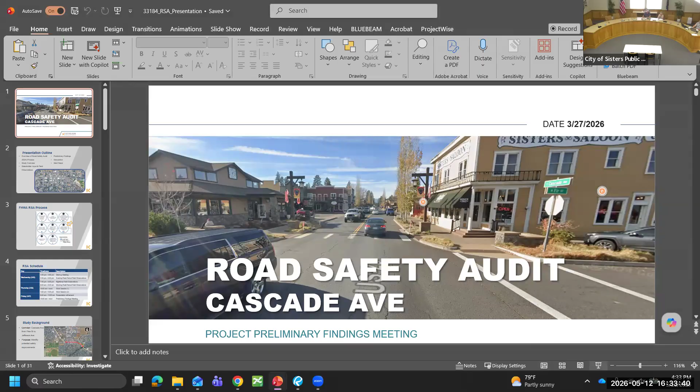Great, thanks, Paul. Thanks for the chance to be here. Matt Kittelson with Kittelson and Associates, and Cameron Thompson here with me. We'll walk through the nuts and bolts of what we did and why. We also had Hermanus Stein. He and Cameron were here conducting the audit. Hermanus is out of the country now, so he's shared his insight throughout the process and beforehand.

I think Paul did a great overview, so I'll just add that the roadway safety audit is a tool that exists. This approach has been conducted in many places, and the intention of it, I think, is really well suited for what the city was trying to do in this particular case, which was: let's focus on a really specific area of town, identify those boots on the ground, observe the conditions during different times of day, different conditions, talk with the people who see it every day, with the intention of really identifying what those solutions can be, tailored to the particular corridor. It's not a broad citywide plan, it's really focused on this specific area.

So I think the process went really well. The outcomes are exciting to lean into. So I'll turn it to Cameron to walk through the process. If you have questions along the way, please raise your hand. We'd like this to, as much as we can, be a conversation about what happened and what we do next.

Thank you. So the presentation here was our final presentation to the road safety audit team, but it provides a good summary of our observations, and then a toolbox of suggestions to hopefully mitigate some safety issues.

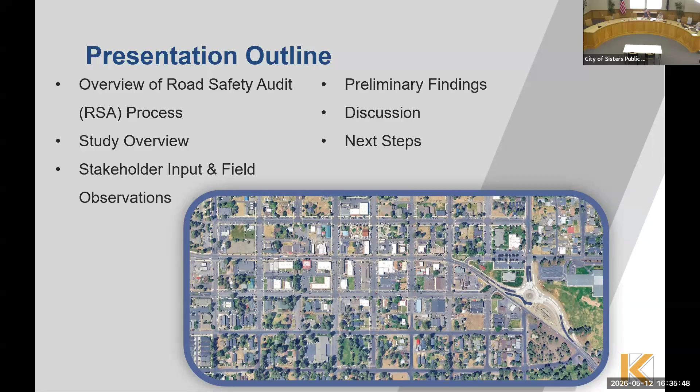We went over the RSA general overview of what it is, but we're more in step 7, 8 now as part of this process. Just a reminder of those 3 days in spring break in late March, we had a startup meeting getting everyone's thoughts and ideas before we went out and did field observations. Then we did field observations in the afternoon, nighttime, and morning, and refined those thoughts Thursday afternoon and Friday as well.

Looking at the actual corridor extents that we took a look at, it's Cascade Avenue from Pine Street to Jefferson Avenue. So this is where we're really focusing our observations and suggestions.

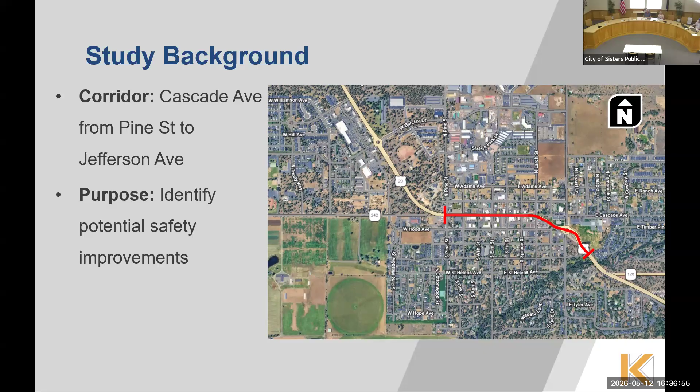As part of the process, before we started the whole 3-day RSA process, we took a look at the city's transportation system plan, looking at planned projects, looking at previous projects that had already been built, most notably the streetscape project through downtown. We also compiled crash data, taking the most recent available 10 years of data, from 2015 to 2024. So that doesn't include 2025 or any 2026 crashes in the data.

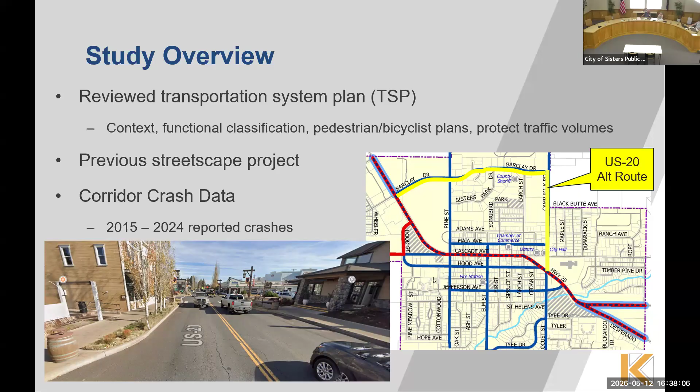And then, as you'll see later in this presentation, we'll bring up this US 20 alternate route a few times. That's really focusing on freight traffic, seeing if we can get it shifted away from the downtown core area and use Barclay and then Camp Polk as that freight route.

Just some general reminders of crash trends that we saw. There were a total of 71 crashes in this 10-year data set in our study corridor. 75% of those crashes were at intersections, and you can see on the map generally where those are. We also circled where pedestrian and bicyclist crashes occurred, and the dashed circle is where that most recent pedestrian fatality occurred. That fatality isn't included in the data because it wasn't available in the summary, but we did want to note that location.

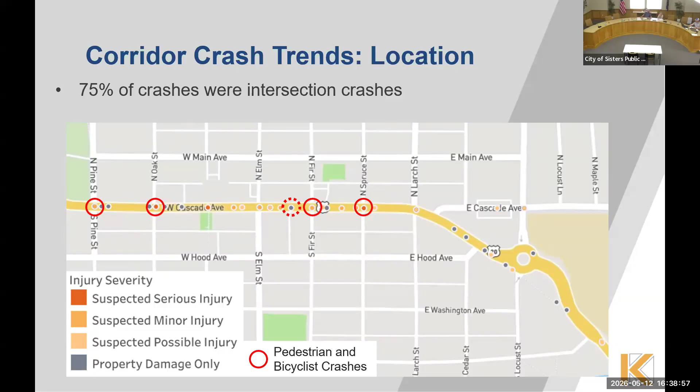Just some general trends here. We don't want to go too deep into the crash data, but about half of the crashes resulted in injuries. There were zero crashes in this 10 years of data that resulted in a fatality. Seven total crashes involved a pedestrian or bicyclist, with all of those as part of the injury crashes. Most crashes occurred during typical daytime, 11 to 6 p.m., at 72%. 34% of the crashes occurred in August and September, so late summer was where most of the crashes occurred. About half of the crashes were rear end crashes.

Now we'll get into some of our field observations when we were out there for those afternoon, nighttime, and morning periods. The first section that we summarized was pedestrian safety, looking at how pedestrians are getting around downtown. First, looking at the crosswalks, as you can see on the right, there are some areas where poles or other objects, or like a car or something, could be blocking a pedestrian waiting to cross.

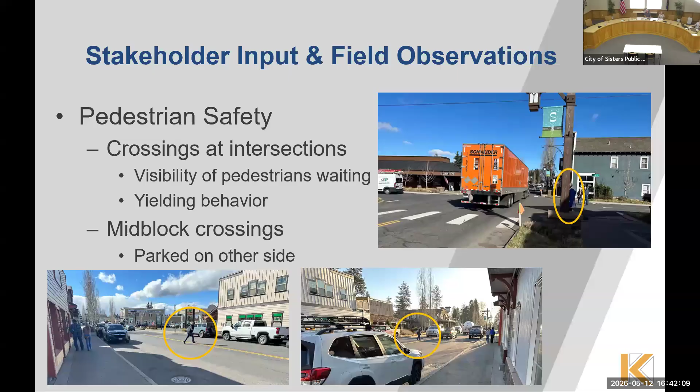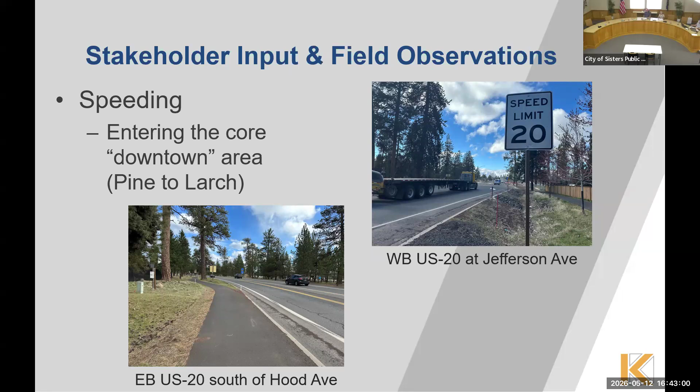Moving forward, looking at general speeding, that was a pretty big stakeholder input point that was brought up. We mostly noticed this on the approaches to downtown, as you're coming from that 55-mile-an-hour highway zone and getting into this step-down speed limit down to 20. Really looking at coming westbound on 20, you're hitting that merge of 126, and then eastbound after the Barclay roundabout, where people accelerate back up to speed and then have to come back down as they're coming into downtown.

Through the actual core area and congested times, speeding is not really apparent as everyone is bumper-to-bumper traffic through town, but definitely people following very closely, just trying to get through. Then off-peak, so mornings and nighttime where the street's pretty open, not a lot of cars parked on the sides, not a lot of businesses open, so people aren't walking around as much — definitely more speeding through that downtown area at that point, as it's just a flat, straight section of road.

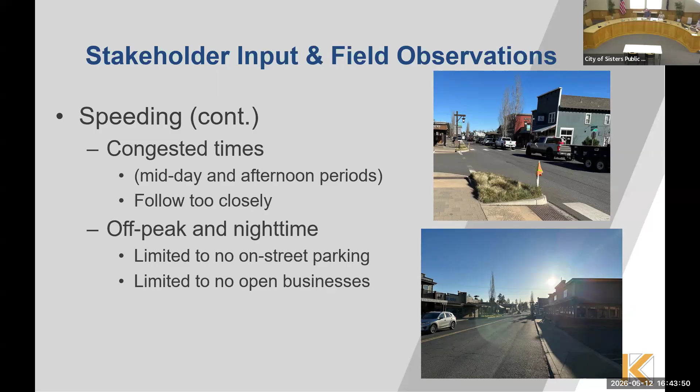Focused a lot on how drivers are getting through town and around town. Noticed a lot of people just moving, trying to get through downtown Sisters generally as quickly as possible. A lot of people with trailers and things as well, and then just a lot of things going on in your vision as you're driving — people stopped trying to take a left through that bumper-to-bumper traffic, a lot of pedestrians crossing, people trying to get out from the side streets. Just generally a lot going on.

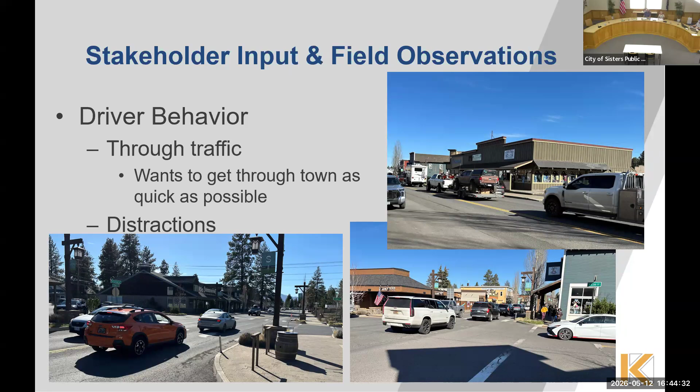Some intersection and crossing visibility items here. On the bottom right, you see a photo of the curb extensions not actually extending past a parked vehicle, so that can block sight distances for drivers coming up on that crosswalk to be able to see a pedestrian. And then lighting — there's decorative lighting there today, but it doesn't really reach the pedestrians crossing the street so that they're more visible to the drivers.

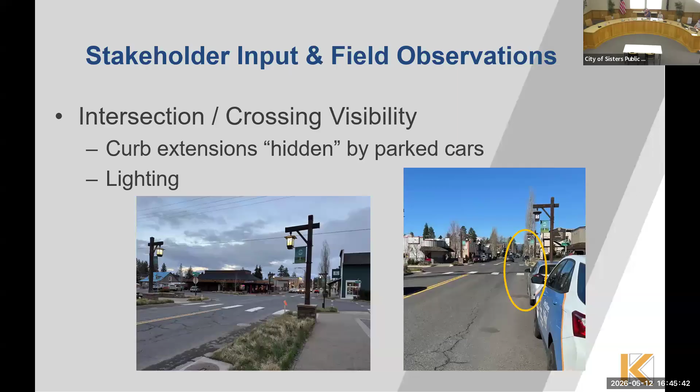Then we looked at what opportunities you have for some mitigation strategies for a lot of these things we've seen and heard about. So the next section of the presentation is really what the memo in the agenda is summarizing, or suggested opportunities. And this is a toolbox, so they don't all need to happen — you can pick and choose depending on what you want to try to address. Another important point I mentioned at the start is that a lot of these are dependent on freight traffic being moved away from the downtown core. There are a lot of requirements to a road that freight traffic is on, so some of these opportunities may not be feasible at this time, but may be feasible further down the line. US 20 is a reduction review route for ODOT, so there's broad influence that the greater community has with the design of that road.

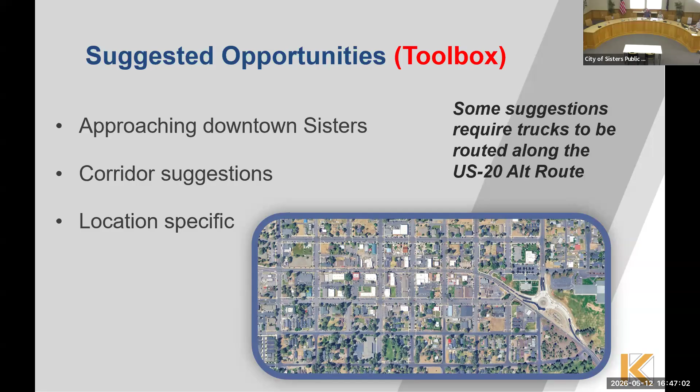So starting with approaches, we looked first at the approach from the west. If you're also looking at the memo, some of these will be shown in those figures. The first three figures are really summarizing near-term opportunities. What we'll show in the PowerPoint is a combination of everything, near-term and long-term, so it's a little bit different format but shows generally the same.

Can I ask a question? So I'm wondering — Bill and I've seen this, and then after we were involved, there was a poll put out to gauge people. I'm interested, was that of any use? Did that provide anything towards the recommendations and the prioritization, or did everybody have different things they liked best? So at least the memo in the agenda was before I think the survey went out, but then for deciding which of these options the city would like to move forward with, that's where the survey came in. So it was of use, and that relates to the priorities that were listed? Certainly allowed the options — nothing real clear.

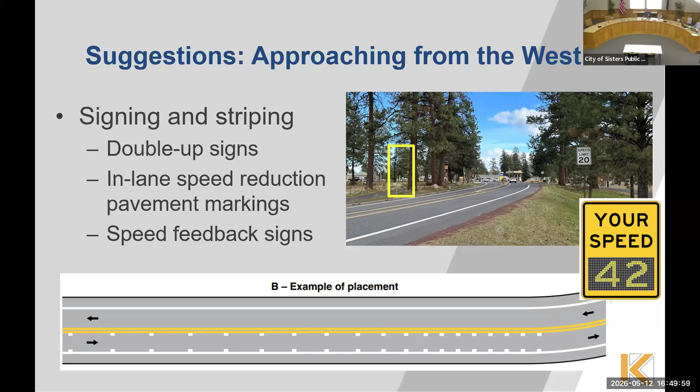Continuing, approaching from the west, this will be a much longer term option, but is a mini roundabout at Pine Street. So that's the thought behind this: as you're coming from the west, you hit the Barclay roundabout, that slows you down, but then you don't have anything physically making you slow down before you get into this downtown core. So it's an option here.

Currently just a concept sketch, just to see if it was feasible. This would be a smaller roundabout than the two you have in town currently, but would definitely require that kind of freight collaboration.

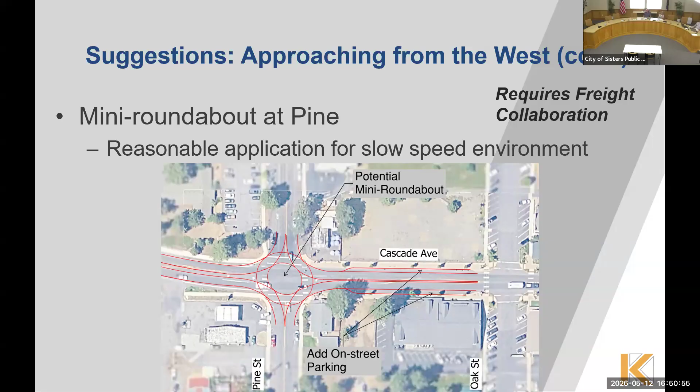Then looking approaching from the east, this is a project in the TSP, adding that roundabout at the intersection of 126 and US 20. This would allow us to remove that merge that complicates entry into town and creates that continuous effect where you slow down now at the 126 intersection, and then you'll get that reminder at the Locust Street intersection as well.

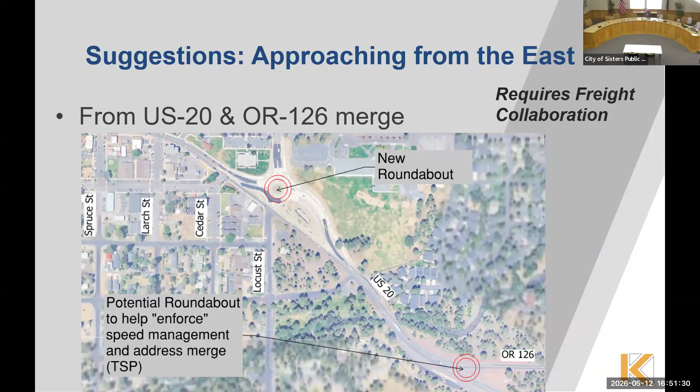If the roundabout doesn't happen, or before the roundabout could be built, you could address some things similar to the west side, doubling up those 20-mile-an-hour speed limit signs to get them more visible, especially during that merge, and also switching out the current merge sign, which is just a right lane end sign — kind of half of that sign essentially — switching it to this newer zipper merge sign that would hopefully encourage people to merge a little smoother through this section.

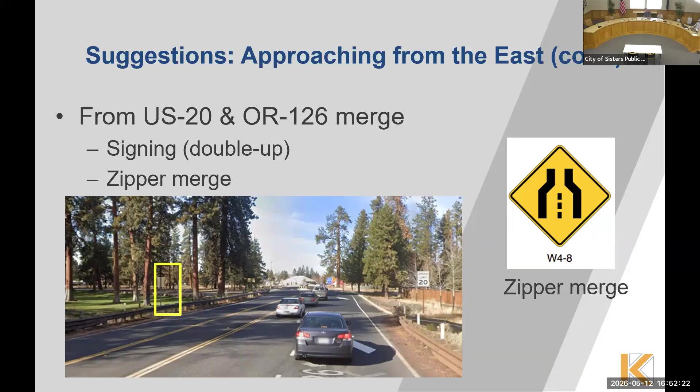There's a lot going on this sheet, but we'll talk a bit more about a lot of these options further along in this presentation.

The biggest one is probably the speed feedback sign after the Locust roundabout. We heard and saw a lot of people accelerating out of that roundabout as they come from that higher speed highway, hit the roundabout to slow down, and then accelerate out of it back up to higher speeds. So we're trying to keep them continuing at that 20-mile-an-hour speed.

And then I'll move along, but we'll also talk about some possible buffered bike lanes, lighting, raised intersections, and just some bike wayfinding signs.

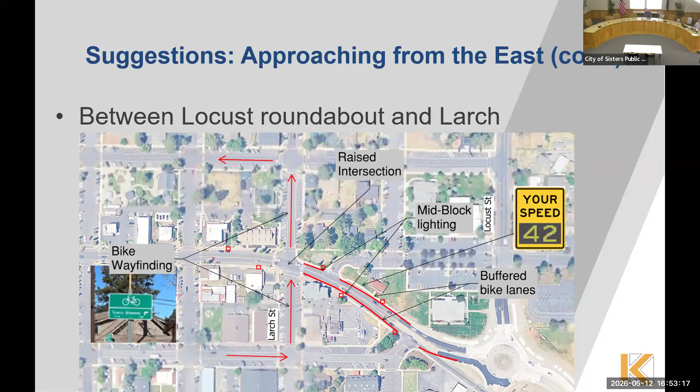Then also approaching each side, a couple options for warning drivers of pedestrian crossings. We didn't want to put pedestrian crossing signs or RRFBs at every crosswalk through the downtown core, as that would get very cluttered. So we figured putting them at the beginning of the corridor, warning people that there are pedestrians that will be crossing the road over the next about 2,000 feet.

I did have a question. Can you go back to one slide? Yeah. On the east side, the RRFB, either coming out of or going — well, I guess mostly the coming out of the curve to get there — is that an issue for design right there?

It definitely could be. We need to look a little more at sight distance, but you can also put in — see if my cursor comes up — an advanced flasher is also an option, but it would be something we'd need to look at for design of that.

I think the curve in general, to your point, having some advanced warning around the curve would be good for that. You can do those advanced warnings so that people know they're coming into it. If you do it too soon, you get that effect of people ignoring it as they get downtown. But we really want to alert them right as they're getting into that core, so figuring out a way to make it work in that general vicinity could help address the curve issue. It's a really complicated location.

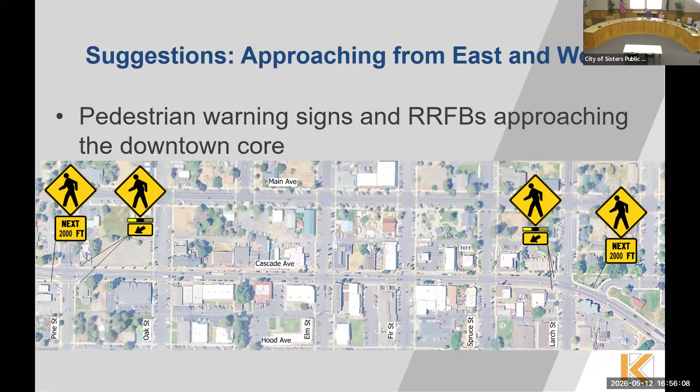So then looking more at the corridor, the downtown core area - these spot improvements, as they were described, are really trying to continually slow vehicles down as they're moving through the corridor, getting those physical reminders to continue moving at the 20-mile-an-hour speed.

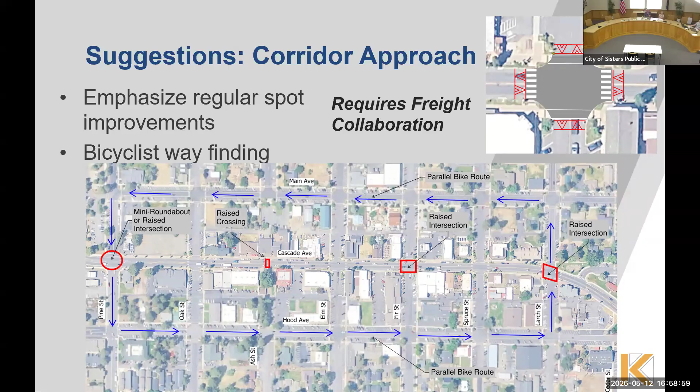Then we looked at how to restripe the entire corridor to reduce some of the lane widths that are there currently. And they're there currently because of the freight traffic moving through downtown, so this would definitely require collaboration.

Looking at the top cross-section, that's the current roadway cross-section with 8-foot parking lanes approximately, and then 14-foot vehicle lanes. So we have the opportunity to reduce those vehicle lanes, narrowing the width to a more typical 12-foot lane, and then provide a buffer between the parking and those vehicle lanes.

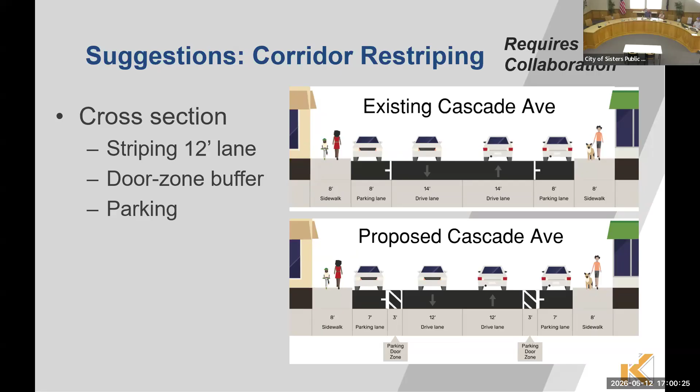This would hopefully reduce speeds with the narrower lane widths, but also provide space for people to open their doors when getting in and out of their cars. That was one safety concern we had heard - when people park along Cascade Avenue, they have trouble opening their doors or getting into their vehicles when it's busy.

And then continuing the striping at intersections - City of Sisters already has the curb extensions, but looking at how to further extend those without actually having to rebuild them. So adding a 4-foot buffer would keep the 12-foot lanes through the entire corridor, where we'd get a few extra feet.

And then those could also include tubular markers in that buffer area, so vehicles can't just drive straight through that area. I remember discussing that one.

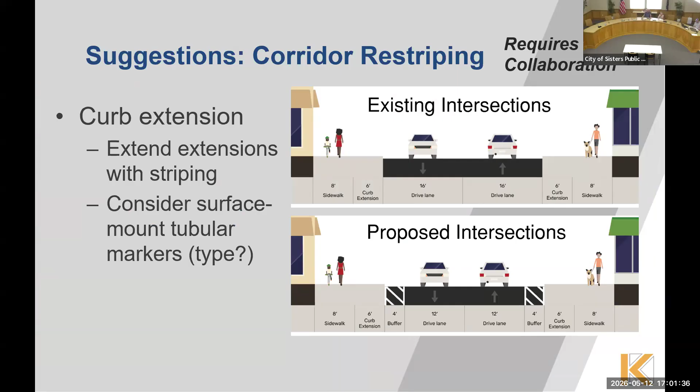I do think there's points to make along - there's a look to this corridor, and putting a bunch of those out, I think is detracting from the look. Yeah, definitely conversations that would need to happen on the actual design of these.

I think it has to do with the one being close to the roundabout. I think it's an ODOT design, they use that red rock design color quite a bit. You see that on signposts, I think it's just an ODOT thing. Because that red one, even though it's 4 feet high, to me that's a lot harder to see than the 2-foot white ones. Yeah, and I think the top piece is reflective.

But I think it highlights the point you were making earlier, just what's that right design feature? Is it something more traffic oriented, or something more decorative in nature? Really, the goal is to shrink the effective width of the road in a way that's manageable with the overall freight conversation. So there's a lot of design considerations about how you could tackle that. But is the goal to shrink that?

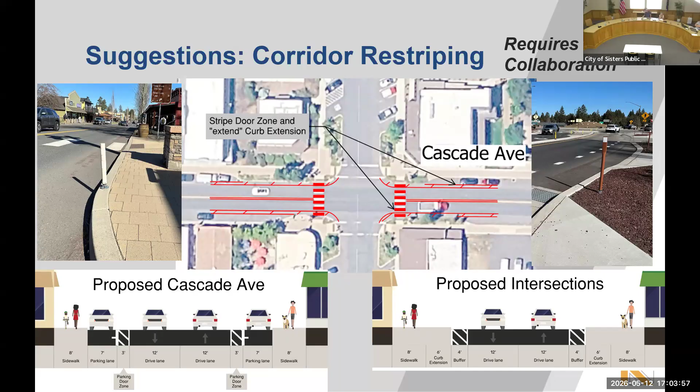Moving on with some of the possible suggestions, I was looking at lighting, and this could be split into two options. Intersection lighting, really lighting those crosswalks specifically, and these could be part of the dark sky compliance that the city is going through, so updating those fixtures possibly. Just the actual light that's on the posts, not putting in new light posts. So that's an option there.

Corridor lighting, so more pedestrian scale lighting throughout the whole corridor. As we were walking through, we noticed a lot of the businesses have lighting on their frontages, so converting that to a city-owned and maintained system where the lights would stay on all night and be dictated by the city.

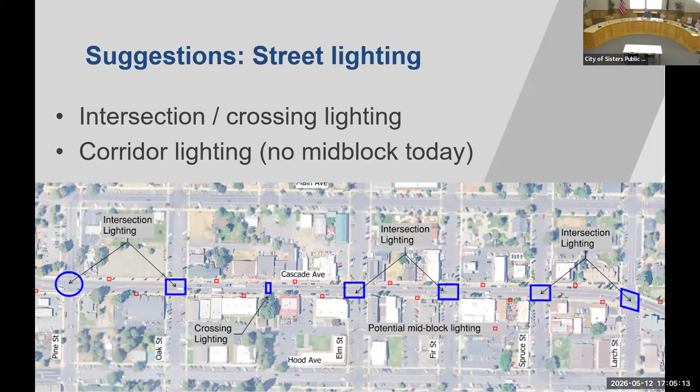One of the more out-of-the-box options was removing parking on alternating sides of Cascade Avenue. This was really trying to reduce the amount of mid-block crossings occurring from people parking on one side and then running across the other. So these would be a little more strategic location-wise, thinking about which businesses are on which side of the street and what areas actually have a lot of the mid-block crossings to reduce those.

But is the pilot the removing of the parking, or is the pilot making it hard for pedestrians to cross? It'd be kind of both part of it. I think removing the parking could be really controversial. I don't know, I have really bad memories of removing parking in other locations. Yeah, that was kind of one of our biggest concerns.

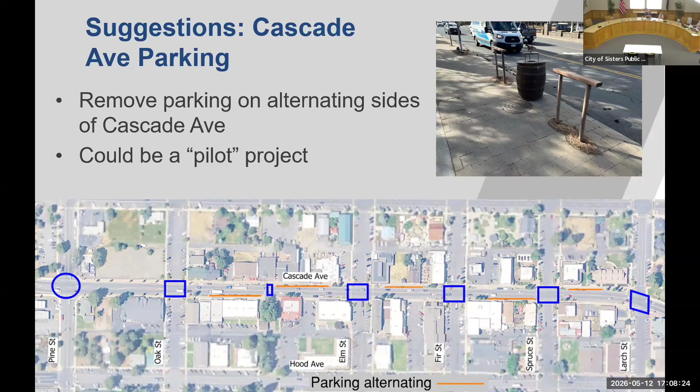These could be outside of entrances, or at driveways where people would park in some of the parking lots off the street and then walk across, just in strategic locations. But something that could be implemented as a pilot project style where it's removable, just to see if it actually works, is kind of the point there.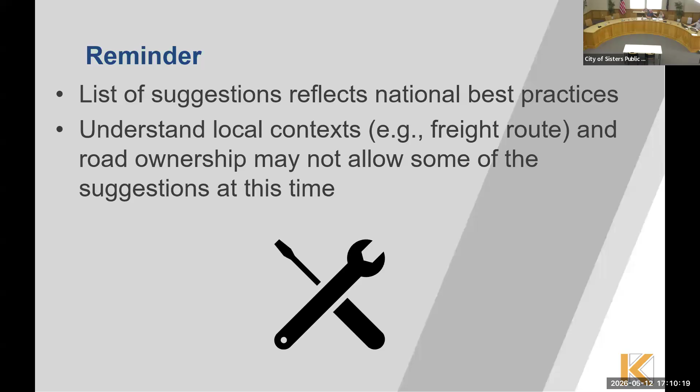And that's generally all of what we came up with, but these are the national best practices for increasing safety, and it's important to note the freight route and the local context and feel of the road.

I think you guys captured it. And actually, the near-term suggestions you put in the memo make real sense, and they're not going to be as burdensome on the city, because it's really just, I mean, the speed signs, the feedback sign, I think those are going to be the most expensive thing on the project, because we need to get power to those.

But alerting people coming into the corridor to slow down, putting the lines to squeeze it in at the ends, making sure we notify people, I think that's going to be a good start. Then we can reevaluate and come back to look at some of the long-term things. But the near-term suggestions are...

Relatively easy to do. Says someone who's never painted a street in his life. Okay.

No, you're absolutely correct. We are going ahead with actually proposing dollars in this year's budget to do those near-term improvements. Good.

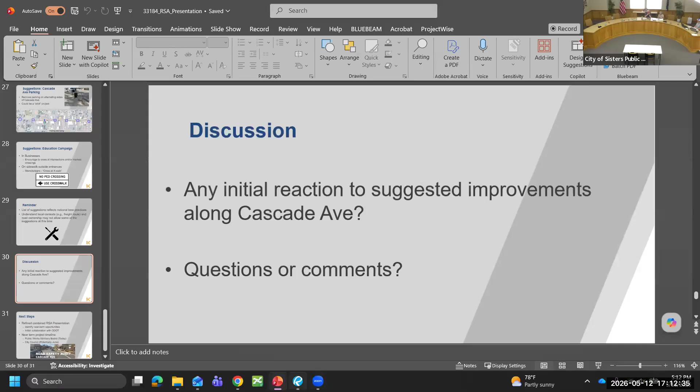I had one more comment. It might be more of a long-term suggestion, a little out of the scope of this, which was focused on Cascade, but it was about evaluating the effectiveness of the changes made to direct more people to Barclay.

Next time around when you do this, that will have been in place more. How effective has that been? I wonder if seeing something in this report about Barclay, that there are improvements going on, improvements planned, it'd be great to find more funding to finish Barclay.

Is there a way to use this report to help with that, so that as part of a grant application, you can hand them this, and it says one of the biggest things you can do is direct certain traffic onto Barclay, and to properly do that we need a roundabout up at Camp Polk and other things for it to work well. Is there some wording that can be put in here that helps do that?

It's a great idea. Makes a lot of sense to us. We could look at it and see the cleanest way to do it.

I think you could point to the TSP, which identifies a lot of those things already, like the roundabout at Camp Polk. We could talk about the alternate routes, and there could be a section saying a great way to do this is to prioritize those improvements already in the TSP for the alternate route on Barclay. I think that would be easy to do, and wouldn't create a conflict we'd have to unwind. So yeah, it's a good idea.